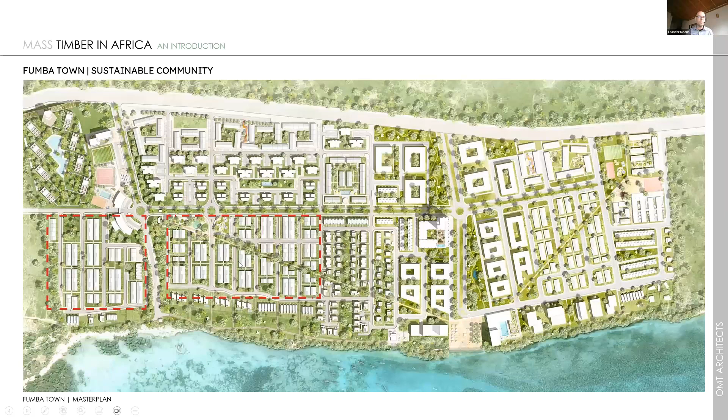We are talking here about a tropical context, and in a tropical context, your concrete is a wet application. It doesn't dry out. It stays humid inside. You can smell the concrete in a new house, and you don't have that in timber. And that was the main argument at the beginning to actually build timber houses. Nowadays, we're planning this whole city where these houses are just a part of. And we started simple, stick built, timber frame, no engineered wood products just yet. Simple houses, 1 story high, a lot of prefabrication, because we needed to also train the people.

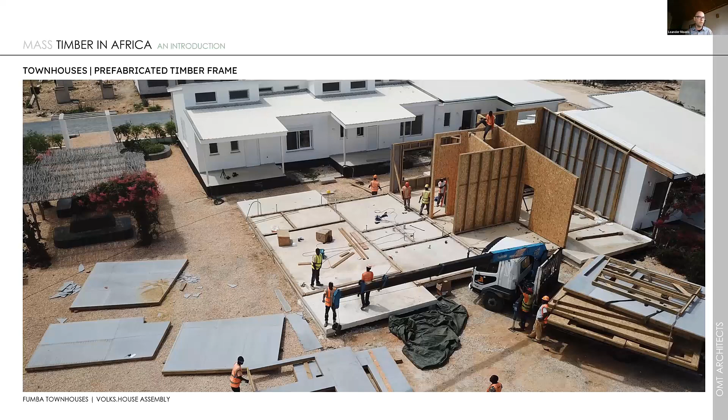We had no carpenters, no woodworkers in the region. So fishermen were re-educated as carpenters, and in a factory setting, they created these first houses, with walls prefabricated and brought from the factory to site. Now, from those houses, which of course were just a single story, we cannot build a whole city. It's not dense enough. So we started to think about a two-story approach. Very flexible housing, also at a low price. These started at 50,000 USD for a 3-bedroom apartment at the beginning.

And I think somebody would kindly need to mute because I have a lot of background noise here. So if everybody can see and mute themselves.

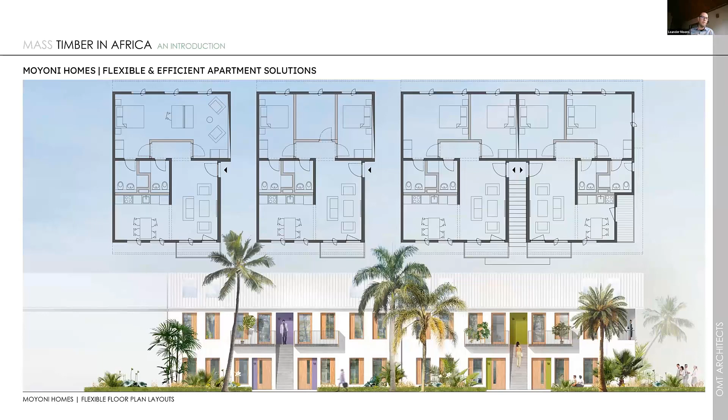But in this house, we first started to use engineered timber. And that, of course, for the ceilings where it was most effective, because cross-laminated timber, as my previous speakers pointed out, is cross-laminated, so it can span in two directions. And therefore, for the first time, we can create a slab with timber, which we never could with the one-directional system, which consists of beams and columns and beams, these more complicated ways of constructing ceilings in the past, which are made more simple by using CLT.

And the interesting thing in this building, we then found out we still had to build a conventional staircase, which is this hole here. And actually there, in the conventional structure, we have seen that timber is much more precise than the conventional structure. So in the first building, we built the staircase first, and then the timber didn't fit. So we turned that around, we built the precise parts first, and then we built the conventional structure into the timber, so that we could make it fit to this very precise building material that timber is.

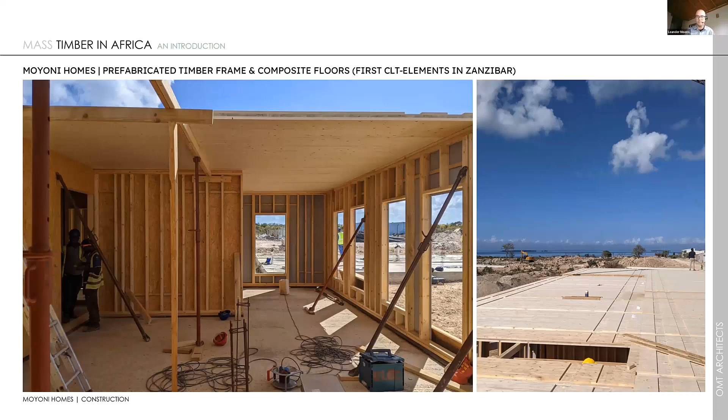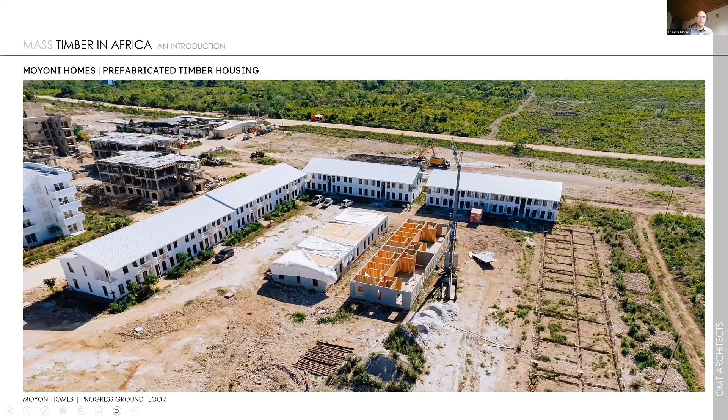Construction goes super fast. One floor is put up in a week, then another week to lay the ceiling, then another week for casting the concrete. And actually what slows down the building process is the curing of the concrete on top of that CLT slab. And then the top floor comes within two weeks with the whole building covered. And as you can see, these are now built multiple times. The only difference is really this staircase, where we changed the sequence of constructing.

The inside is very simple and a relatively open plan setting, which allows for one to three bedrooms in there. One thing I want to point out, of course, in a tropical context, cross ventilation is very important. Overhangs to protect the wood on one side, but also to reduce the heat gain on the inside by creating permanent sun shading, are very important design measures we have to add on to timber. Especially the protection of the timber from rain, which was mentioned, is in a tropical context even more important than in a more temperate climate.

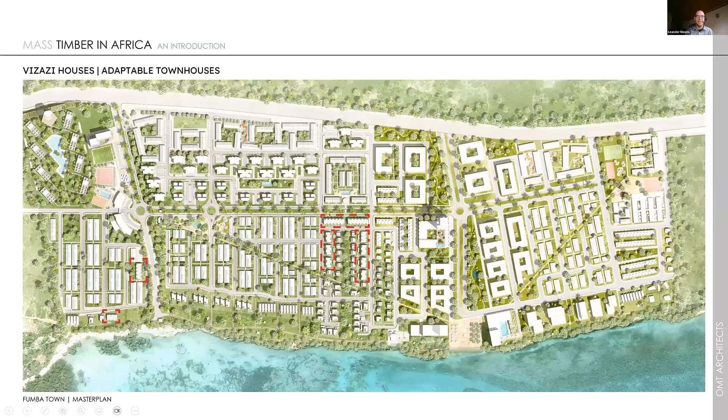So from there, we all got very excited about CLT. We started to build this building out of complete CLT. And that was one of a kind. We will never do that again, although it was fantastic. This just comes as a Lego box onto site. You put it together and you have your building.

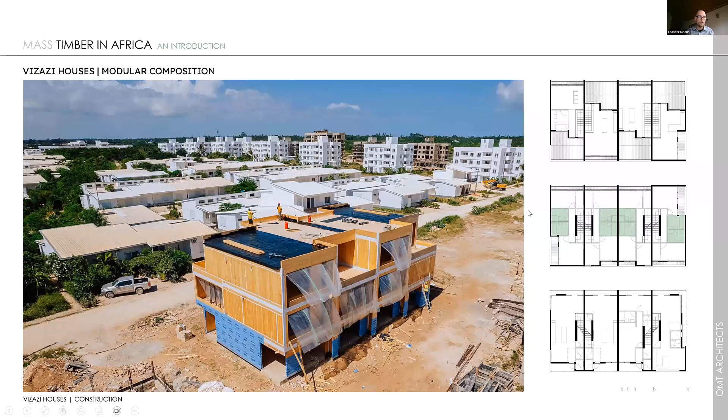And actually the supervisors from Europe who were supervising the local team landed late at the airport, and the local team already started, and the supervisors from Europe couldn't believe their eyes when they came there, how fast our local guys were with the application of the material, because it was not so different from the prefabricated elements we are using for the other projects. So again, it looks great, and also is great from the inside. Of course, we try to expose as much as we can.

But then when we're looking at cost and resource effectiveness, we found that it's not necessary to use so much CLT. And this is the same as how you also would not build a completely massive concrete house. You build a concrete house using masonry, using drywall. So also when you think about timber, we have to think about resource effectiveness and which system is appropriate where.

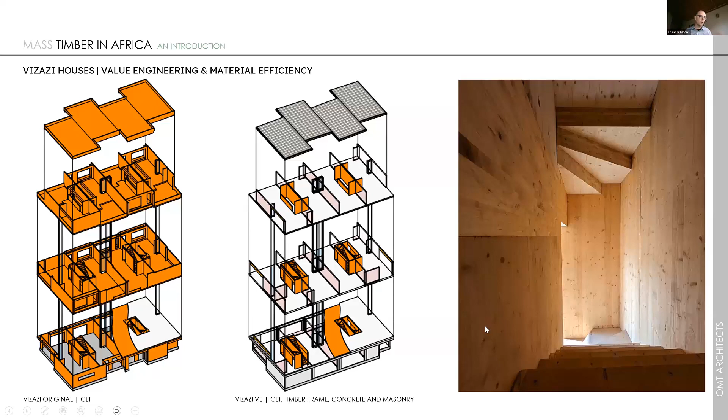And we used a lot of timber frame walls because they are more effective in terms of the resources and also the cost in the end than CLT is. Of course, what we kept is the core of the project, the staircase, where all the CLT is exposed. Now we were doing all these projects, and then our client said, but you know, nobody really notices what we're doing.

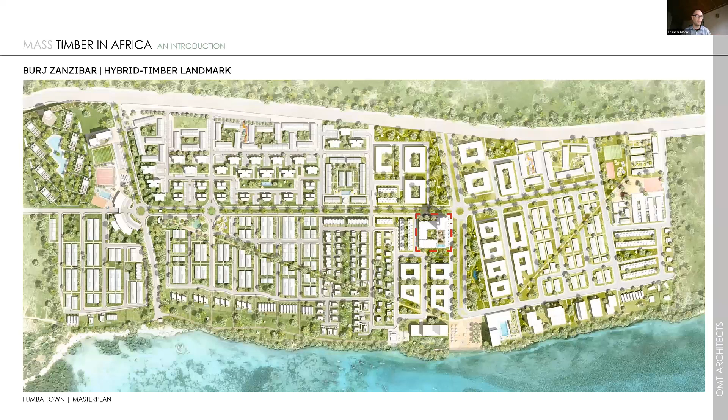Can we not do something strange and awkward and really set a landmark for what we're doing? And that became the project we are kind of known for at the moment, the Burj Zanzibar, which is actually not so complicated when you think about it. It's a lot of stories stacked on top of each other. The complication lies in convincing the authorities that you can do this in timber, where no engineer in a local context has ever worked with timber.

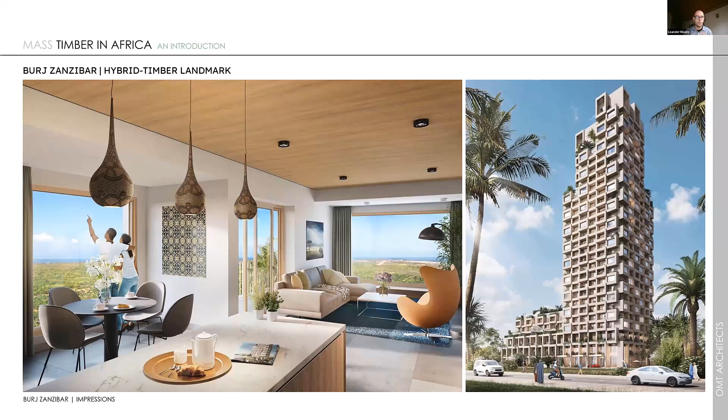So we are confident, and this project is going to site later this year or early next year, depending on how everything rolls out, that we are going to pull this up, and that will be really a game changer, I think, also in the African context, because currently this would be the highest building in the whole world built in timber. Of course, that building is very much relying on the same elements, a lot of modular approach, a lot of modular building elements to keep the cost in check, also to make sure that the logistics are well handled, so that when one piece is missing, the whole project doesn't come to a standstill.

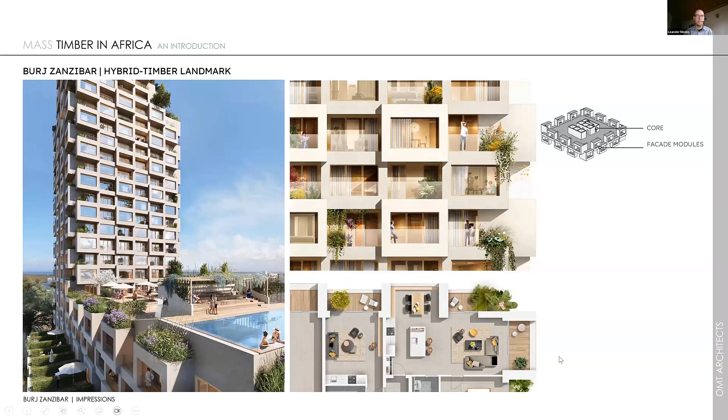Because unfortunately, this wood still needs to come from Europe because we cannot get that same kind of quality wood from the African market. This also has to do with the advantage on one side that we can grow our wood faster, which is a disadvantage on the other hand because the wood is less dense, and therefore the properties of an African CLT product are not exactly the same as a European CLT product. And this is something we always have to keep in the back of our minds so that we don't get mixed up with what is possible with which product.

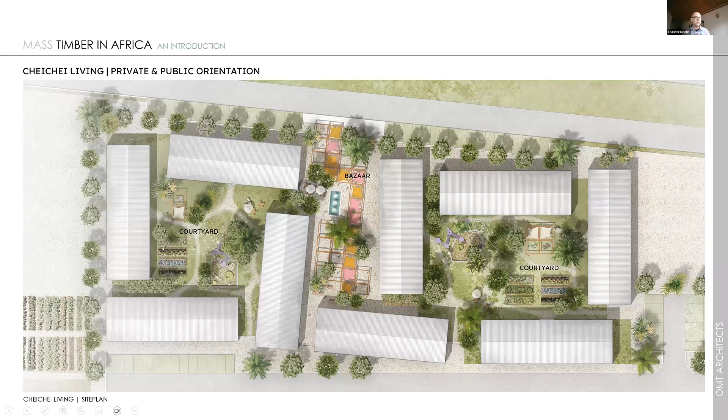And then at the end, Marcus already talked shortly about this project, but I find it important to point this out, because the tower is great as a landmark project, but actually this project Cheichei is for us a lot more important because this is the first time we are really achieving affordable, equitable housing in the local context. We are selling units here for $10,000 built in timber, and all the other projects have led to making this possible.

We also looked very carefully into the local context. We don't want to make a project which is not appealing to local people. So we took a lot of design approaches from the local context in Zanzibar, where you see a lot of 100-year-old timber constructions as part of their buildings, as part of balconies, permanent sun shading, and circulation as well. And that we looped into this housing project, where we have a portico as a social entrance to smaller apartments. And all of that is built in timber.

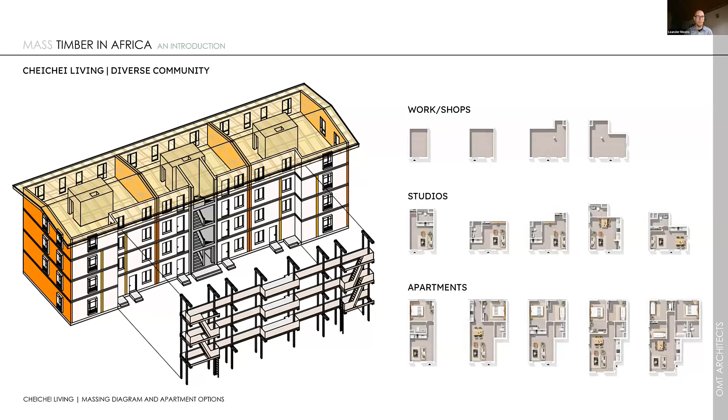One additional architectural component is, of course, that we didn't want to make a very homogeneous building. We wanted to be as heterogeneous as possible, so a lot of different apartment types. We developed 64. That was too much for the developer. They reduced that back to 14. So we're now building this house with workshops from 10 square meters, going to studios, then to apartments with 1 to 3 bedrooms, all in the same project.

Yes. We're almost there, right?

I'm almost done. So again, here we went through the same iteration, optimizing the project, now not looking at resources, but at local availability, because this is the other important thing. We can look at resources and say this is really reducing it, but do we get it on the local market? And I think that is where we have to work, especially when we look at the value chain. I'll skip a couple of these slides.

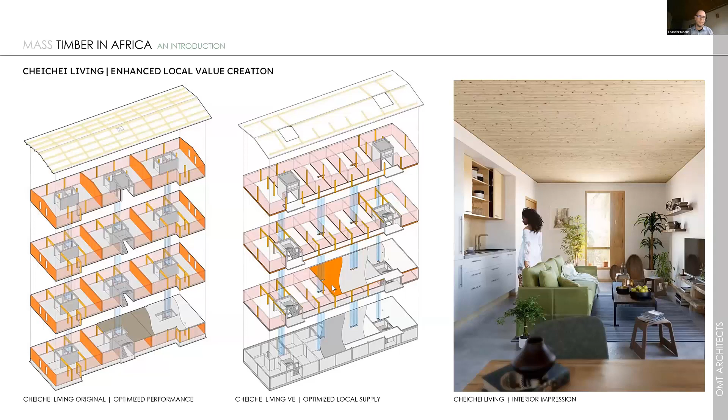When we look at the value chain for timber, we need to start with the demand side. We will not bring up an industry when there's no demand for the project and for the product. So we need to develop simple timber structures and then go to more complex system structures. When we start with the complex structures, we will need to import all that material and we will bypass local markets. That was the experience we made throughout our projects, and I think it is important for us all to understand when we start building and planning with timber as architects.

And of course, in the end, it's not about the project, it's about the community we're creating, which goes a lot farther than that. We have to preserve our green space and we have to create our communities.

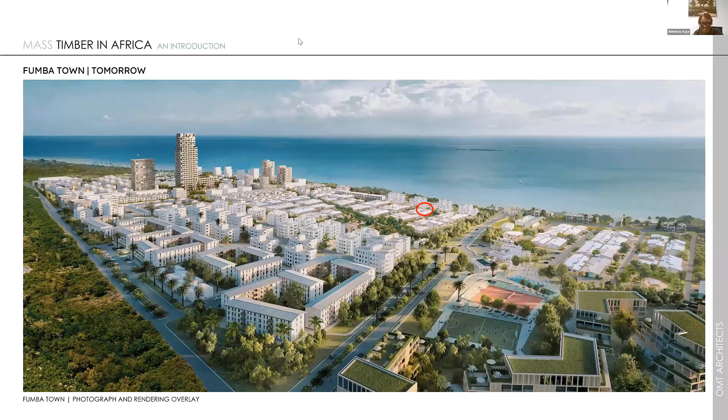Thank you. I'm just going to highlight maybe about 8 or 10 points. So Leander Moons had mentioned that there's a lot of misconceptions with timber, saying that getting into mass timber construction systems may be harming our forest, but that it's not exactly true, because of the way trees grow themselves, and the fact that mass timber is considerate of the complete value chain, from afforestation to construction.

He did mention that in his experience, it was possible to train people who don't even have a construction background in the use of this material, and that construction is fast, it is effective, it is resourcefully effective, especially when you compare with building in concrete. And of course, he did emphasize as well that in their experience, using the hybrid system is better than going all CLT. He also did mention that the modularity of the system helps to eliminate cost.